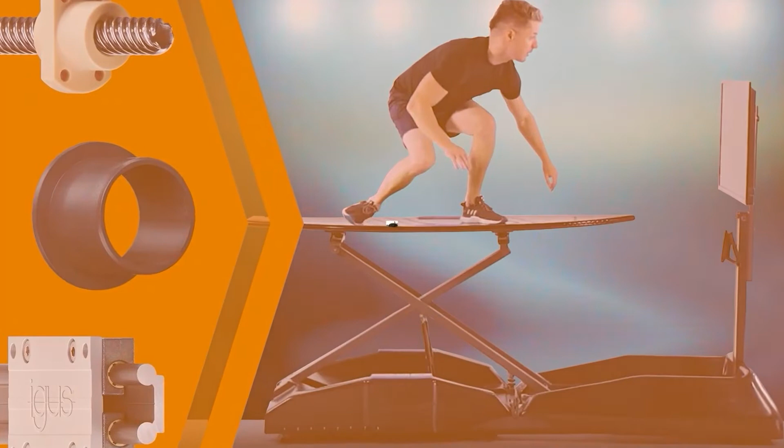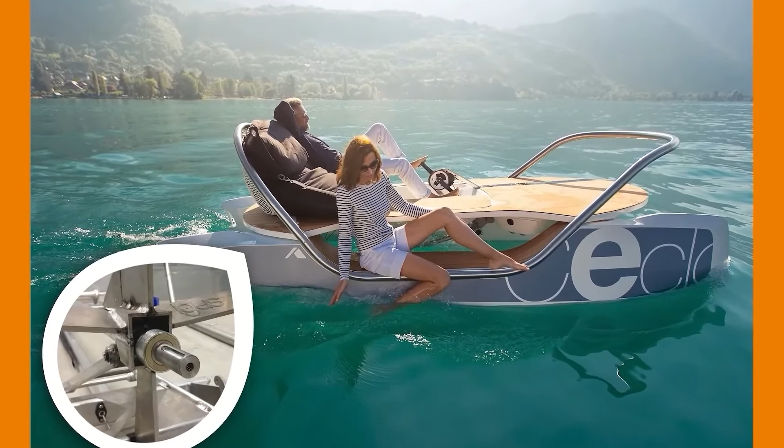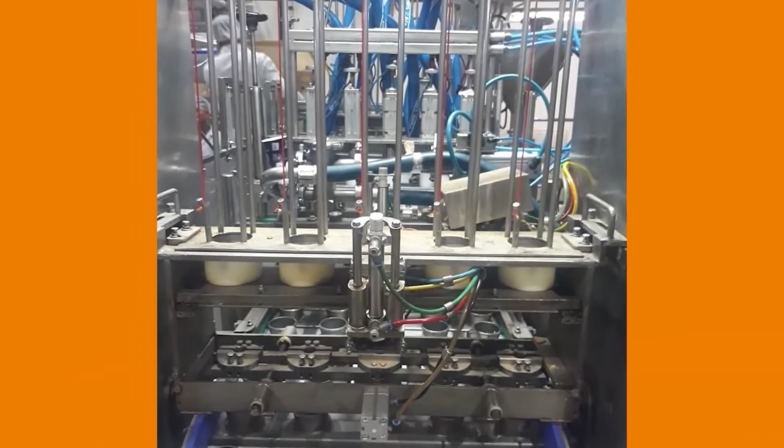The main cause for using igus plastic bearings was the need to develop a quick change system of maintenance on our pedal. The use of these components, because of their lightness, excellent wear resistance and self-lubricating capacity, turned out to be essential. Due to these positive properties of iglidur plain bearings, we can also comply with strict environmental regulations by eliminating additional lubrication. igus drylin linear bearings are lubrication-free, hence it is suitable for us to directly clean it using water and detergent. It is clean and FDA compliant.

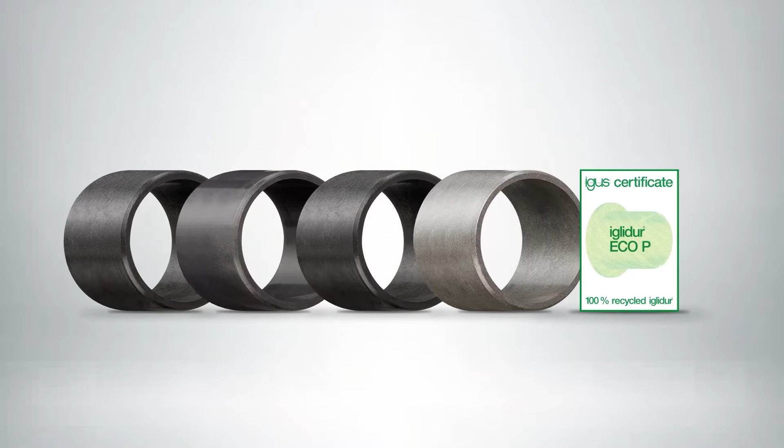First, today we are presenting the first plastic plain bearing program in the world which is manufactured from regranulate, meaning production waste. This is a true small circular economy miracle. But what does this mean? We offer plain bearings from 4 different materials in 12 different sizes, entirely made of recycled production waste.

The service life of each of these plain bearing types can be calculated online, of course. They also undergo the same testing and quality control as any other igus plain bearing does. They achieve almost identically good properties as comparable standard plain bearings.

Second, in addition, we have calculated the CO2 footprint for all 16 standard iglidur bearings from our catalog. For this purpose, we have calculated the energy balance of the complete manufacturing process of the granulate, as well as the entire process of refinement and production at igus for each individual size and each individual material. The values for each article are available in our webshop since April.

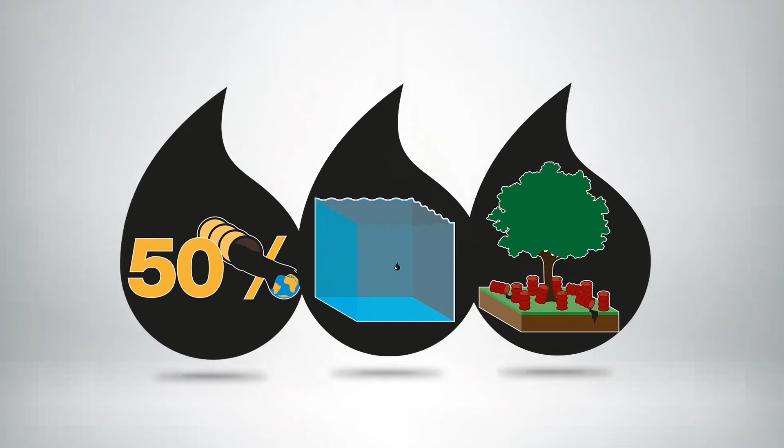All of our motion plastic products are completely free of grease and lubrication, making them the answer to a worldwide problem: pollution caused by the leakage of lubricants that often end up in our groundwater.

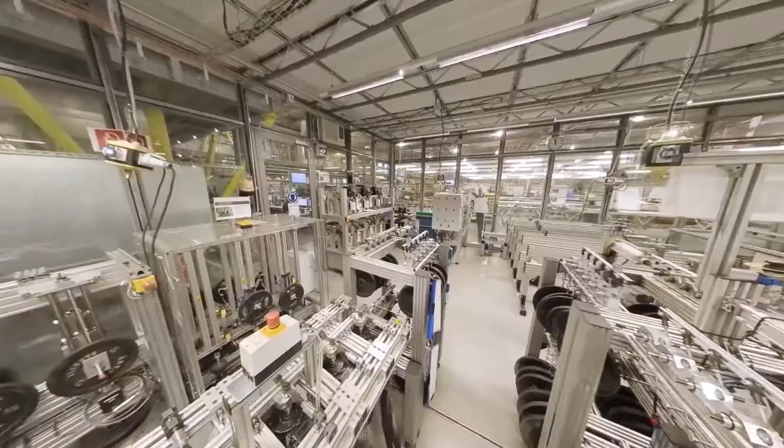50% of all lubricants sold worldwide end up as pollution. 1 liter of oil contaminates 1 million liters of water, and a total of 27 million liters of grease pollutes the environment every year.

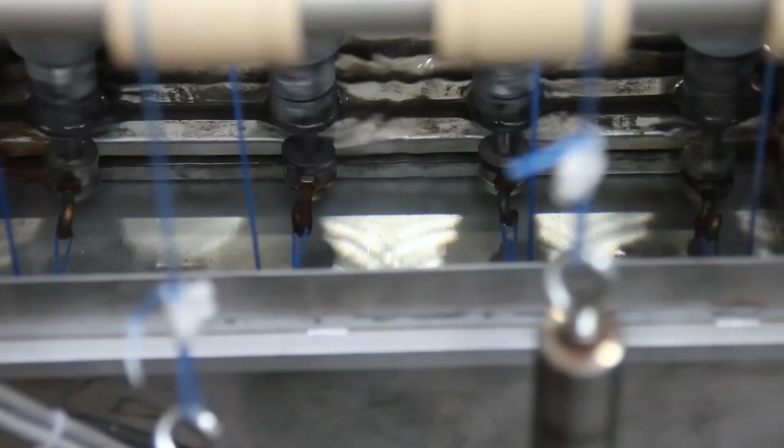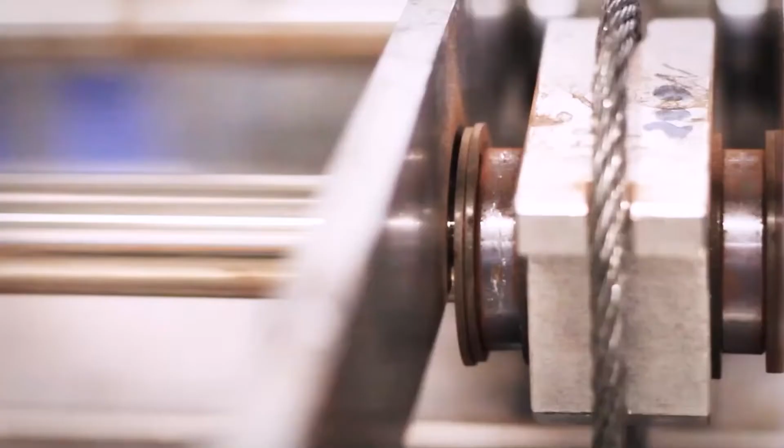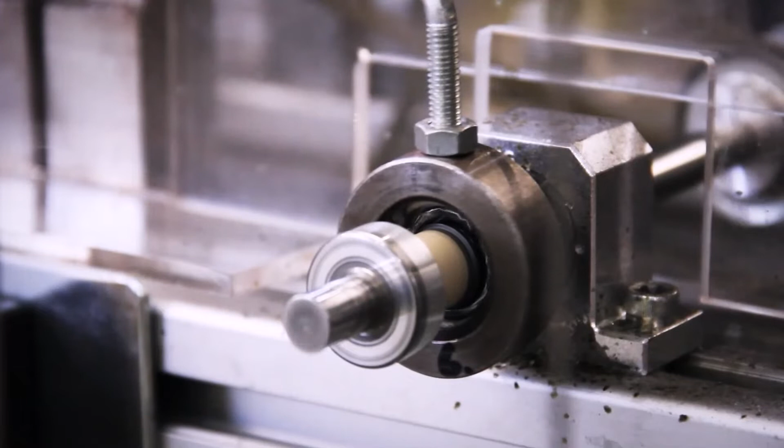However, we do not only research topics such as sustainability and freedom from lubricants, but also constantly work on making our plain bearings more durable, efficient and innovative. We perform around 11,300 tribological tests each year in our test lab to develop materials that meet the highest requirements in customer applications. Our plain bearings undergo tests for wear, friction and noise on almost 100 test rigs with over 750 test stations.

We do all this to test both their properties and their service life under different loads. The result is 60 materials which we offer in the form of standard bearings according to DIN, and many other designs. Customers can calculate the service life of each bearing online or order it from stock.

The material expertise flows directly into all motion plastic product areas. Today we will present some of the innovations that this brings out. For example, an extremely quiet 2-component ball bearing and tiny 3D printed geometries. My colleagues Lena and Tom will tell you more about these innovations now.

Imagine a bowling ball rolling over a wooden floor. Do you hear the rolling sound amplified by the soundboard of the floor? This is exactly what happens in a ball bearing made of hard race rings. Structure-borne noise amplifies the volume. It gets even worse when such a bearing is installed in a resonating body.

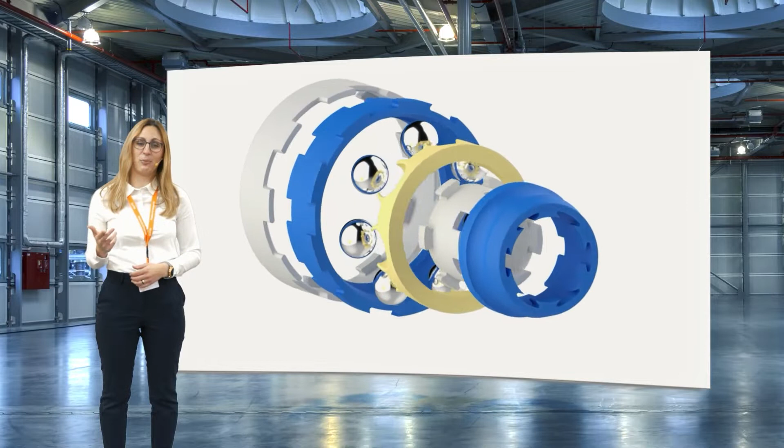A soft running layer, on the other hand, dampens the noise and prevents the transmission of structure-borne sound. By pairing 2 motion plastic materials in the bearing rings, we were able to combine the respective advantages in terms of stability and noise development in the best possible way. True to the motto, hard shell, soft core, our 2-component ball bearing has been created.

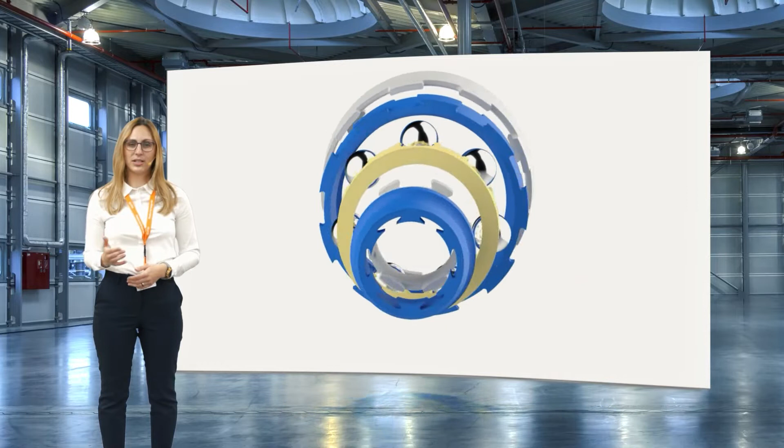The blue layer in the ball bearing takes over the dampening properties and is also highly wear resistant. One disadvantage: the material is very soft and could fall apart in a one-component variant in the worst case, especially at high speeds. To ensure dimensional stability while maintaining low noise properties, we decided to combine the soft material with a hard shell.

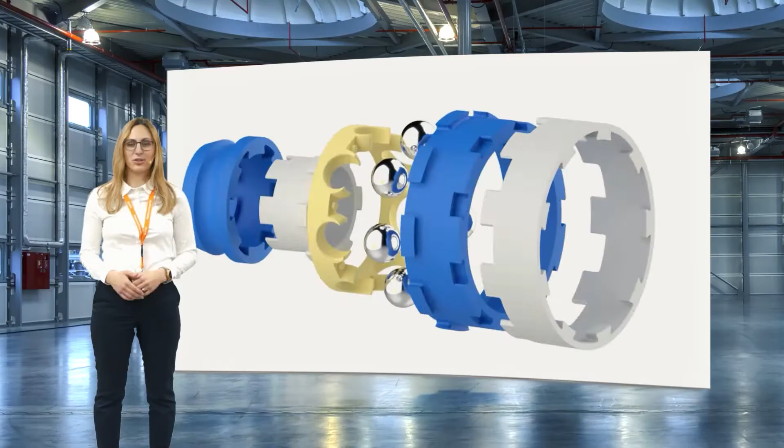Since the soft component is molded into the hard shell, the balls always run on the soft component, all supported by the hard shell, of course. The distinctive design of the shell ensures better adhesion of the materials and prevents the running layers from separating. To keep the balls at a distance, a wear-resistant cage made of iglidur J3 is used.

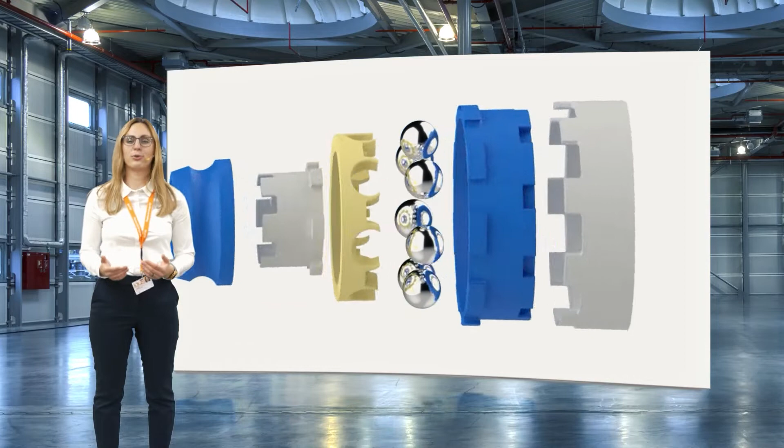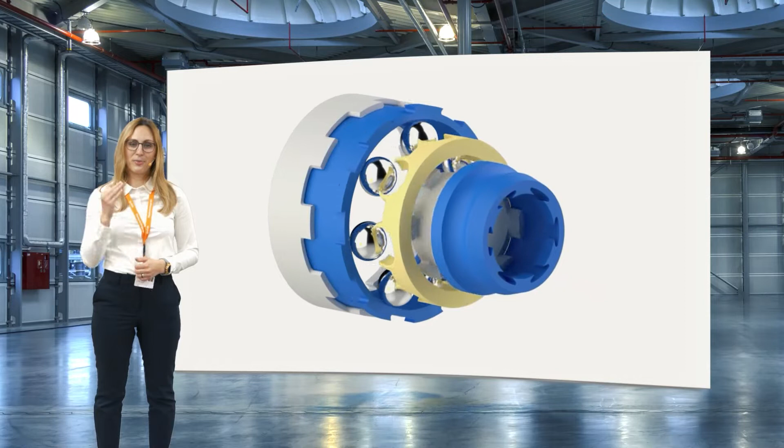The two-component ball bearing, a world innovation which is both smooth running and dimensionally stable. We see our 2K bearing in use wherever high speeds and low noise emissions are required, for example, in ventilation technology, such as bathroom, roof, or computer fans. And now to my colleague Tom with the world innovation in 3D printing.

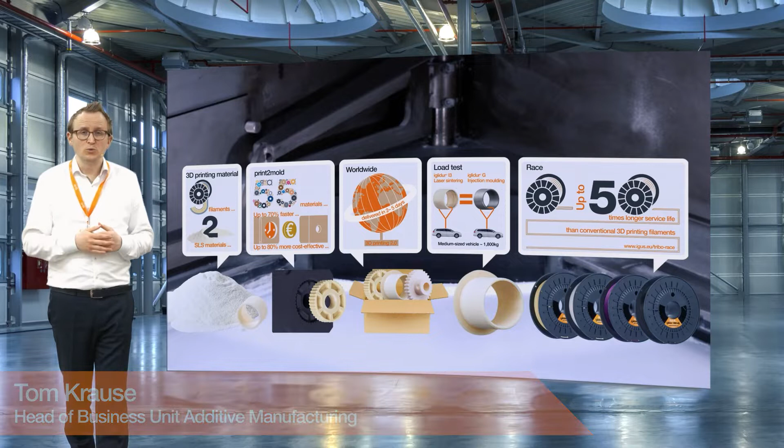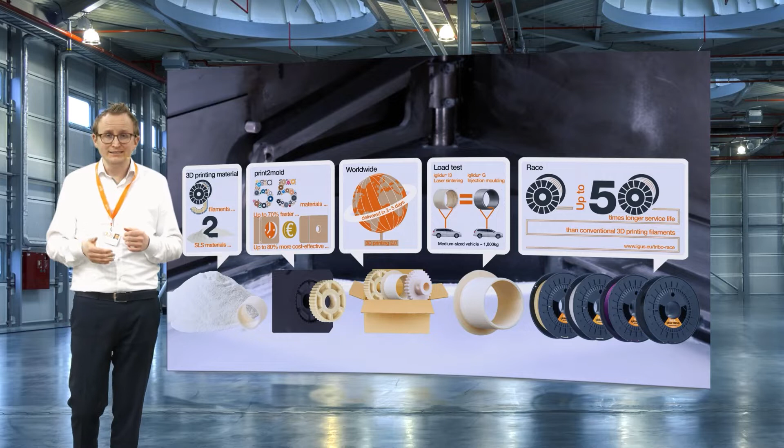3D printing is getting more and more important because it offers new possibilities for designers and scientists. As you know, in 2021, supply chains globally weren't working as well as they should be, and 3D printing can be a solution to that. In Cologne, we printed last year more than 200,000 wear parts from lot size 1 to 10,000.

But this can also be very big wear parts, up to a size of 3 meters, because this is a new big scale print service, which we already showed you last year. This year we are going to the opposite, down to 35 microns, so 0.035 millimeters. This is half as thick as your hair. And this is the new resolution of our new DLP 3D print service.

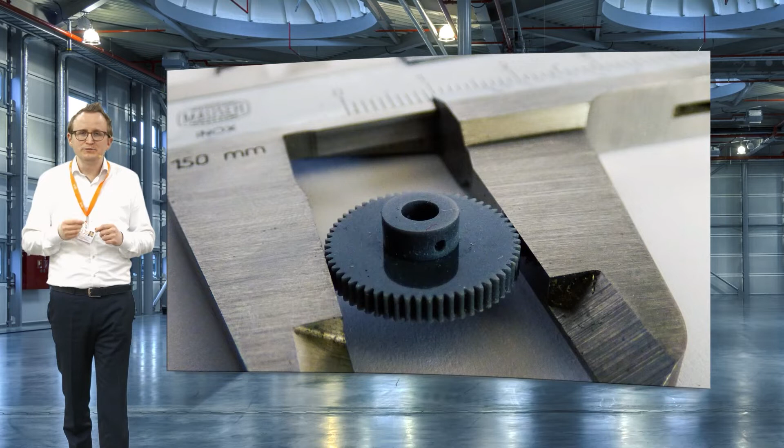DLP is digital light processing, where a liquid resin is partly hardened by a projector. The advantage of this new printing method is it's now possible to print super fine wear parts and gears with a super shiny and smooth surface. As you see on the gear, the shaft of the gear is reflected on the part.

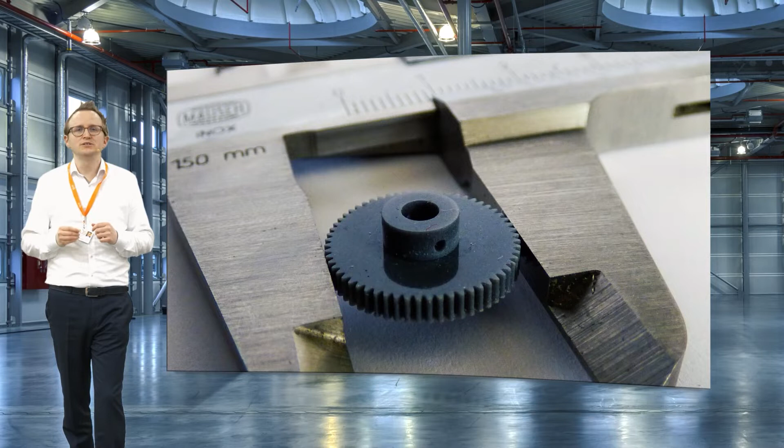This shows really good how smooth and shiny these surfaces are. But what's the new thing? The new thing is we developed a material which is especially made for wear and friction.

In the first step, we tested 10 DLP materials, which are the 10 most used materials on the market. You see the lifetime is more or less the same, there are no big differences. And we know the lifetime is not good because it wears really quickly, and therefore it's not really good suited for all kinds of wear and friction parts.

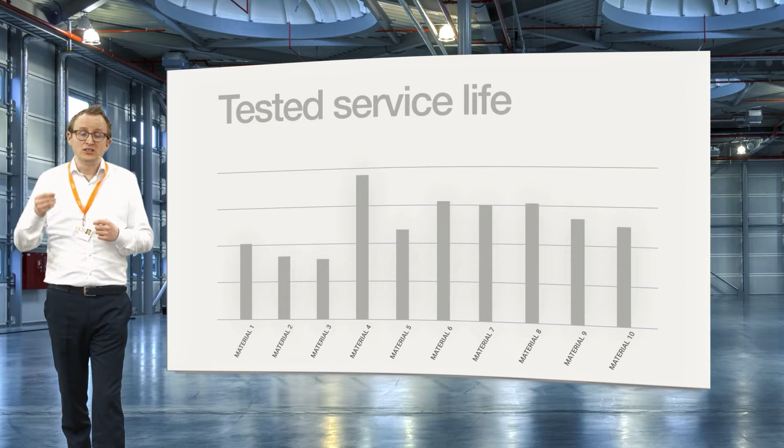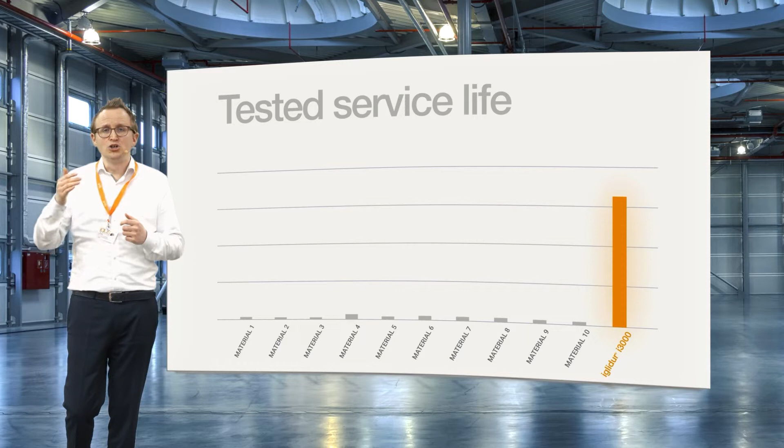In the next step, we developed and tested lots of different formulas until we found our favorite, our iglidur i3000, which is the first DLP material especially made for wear and friction, where the lifetime is 30 to 60 times higher compared to all tested DLP materials. Therefore, I'm super excited for all those new customer requests and applications for super fine wear parts and super fine gears that last just as long as regular parts.

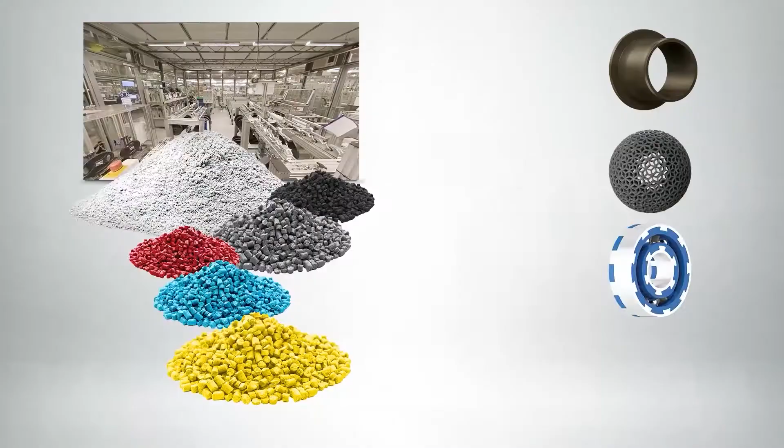The sustainable bearing, the 3 times quieter ball bearing from Lena, the super small 3D printed component with 30 times longer service life from Tom. Our materials expertise also flows directly into linear technology, because in all linear units from igus there is a plastic gliding element or a gliding foil as the heart. Stefan will tell us about the quantum leap that this igus research could make for the field of linear technology.

Welcome to the igus DryTech laboratory. Today I would like to tell you about a sensational breakthrough in the tribology of dry running plastics. The sensation is called E3.

For more than 40 years, igus has been researching tribology, the study of friction and wear, in order to achieve further quantum leaps. There have been a lot of groundbreaking developments in recent years, among many other things, an extremely abrasion-resistant bearing material for linear technology called A160, which can even be used in direct contact with food, meeting the requirements of the Food and Drug Administration, the FDA.

After years of research and countless tests in our laboratory, our developers have now managed to produce a material that has a sensational coefficient of friction. In many everyday situations and in industry, coefficients of friction determine the suitability of materials for specific applications. The pairing of materials is an important factor here, because not every material slides in the same way.

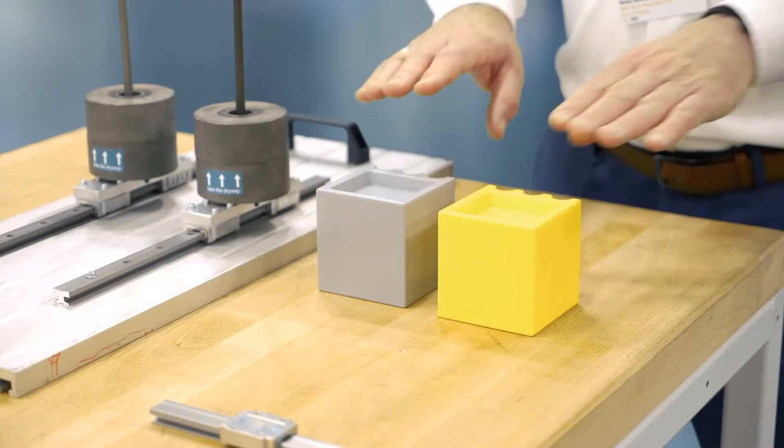One conclusion is, low coefficient of friction means low driving force. Maybe you know this from your last winter holidays when you prepared your skis or your ice skate blades to get faster. With our new development, E3, the coefficient of friction of the plastic glider in combination with the coated aluminum rail is below 0.16.

If you compare this to some standard materials, you can see an improvement in the coefficient of friction of up to 40%, and even more compared to conventional bearing materials. I would like to add, the systems are dry running without the usual external addition of oils or grease to the bearing point. The right recipe, the necessary preparation of the material, and the precisely coordinated processing of the polymers are part of this secret of the coefficient of friction.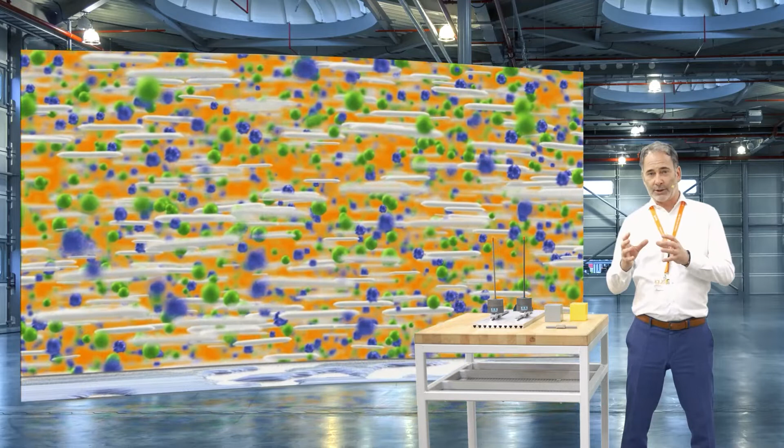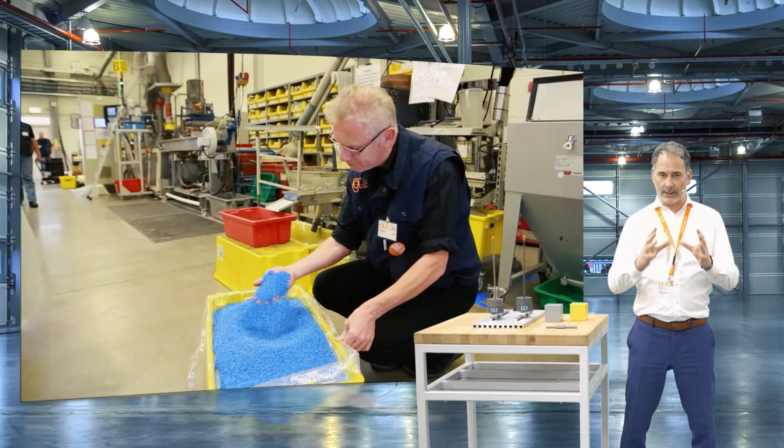In addition to the suitable base polymer, this also includes the optimal fiber orientation and length, and the smart addition of friction-reducing solids. Slight changes in the treatment of the material quickly lead to significantly worse technical parameters. Therefore, we pay attention to the highest precision and care when compounding, mixing, drying and processing in the injection molding process.

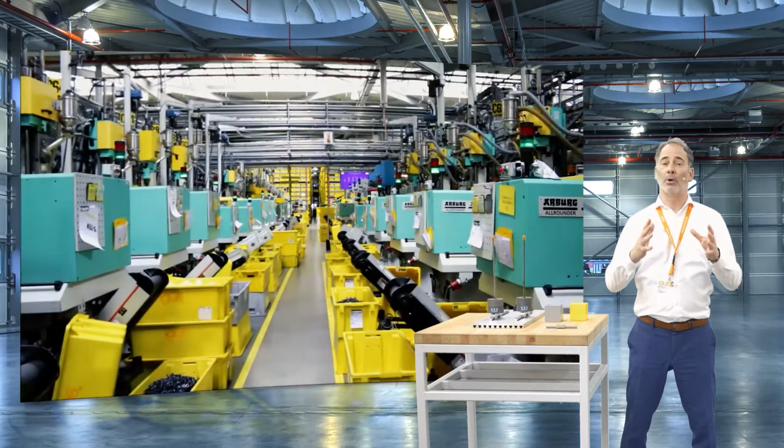The new material that I am going to present to you today is called E3 and will be used immediately in our linear technology, to describe it more precisely, in the miniature TK14 series. This small linear guide is suitable, among other things, for laboratory technology, desktop devices, medical technology, and so on. Because paired with its lack of lubricants, low weight and quiet running, this linear guide shows its strengths here in particular.

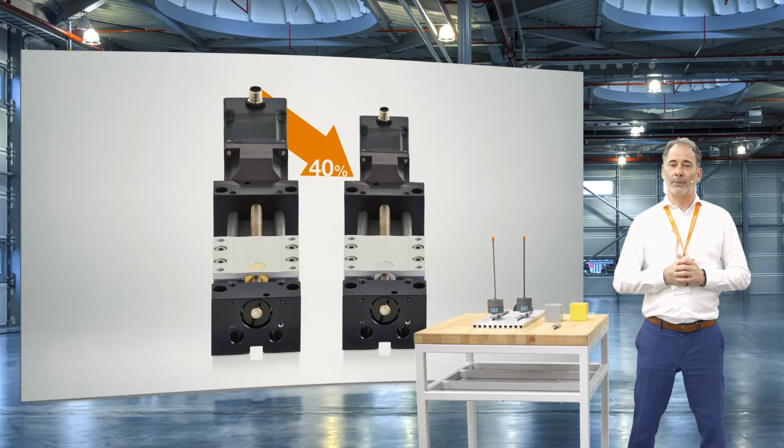In summary, what does this development mean in practice for the user, for you? First of all, the new phenomenal coefficient of friction offers operators an even more comfortable and easier moving of the slider in manual, hand-operated applications. Second point, in the case of motor-driven applications, the motor force can be reduced, or at best the motor can be selected smaller, since the driving force required is significantly reduced and energy is saved.

And also, perhaps the most interesting point for designers is the new freedom of design and construction. The 2:1 ratio that has been dominant for decades, which states that the maximum distance between the drive and the bearing may be twice the length of the bearing, is being replaced.

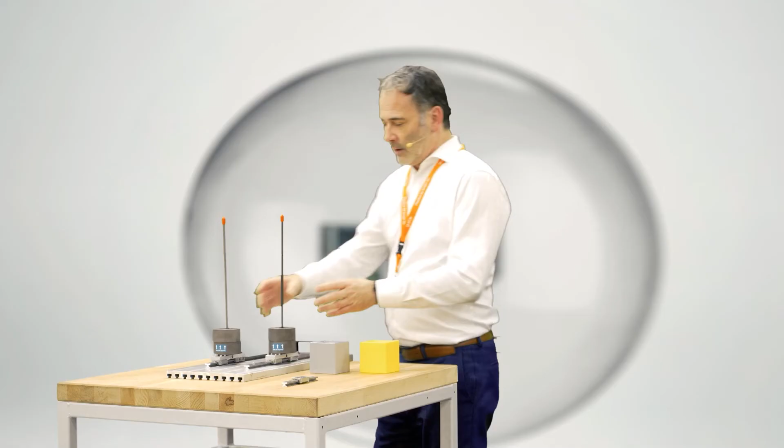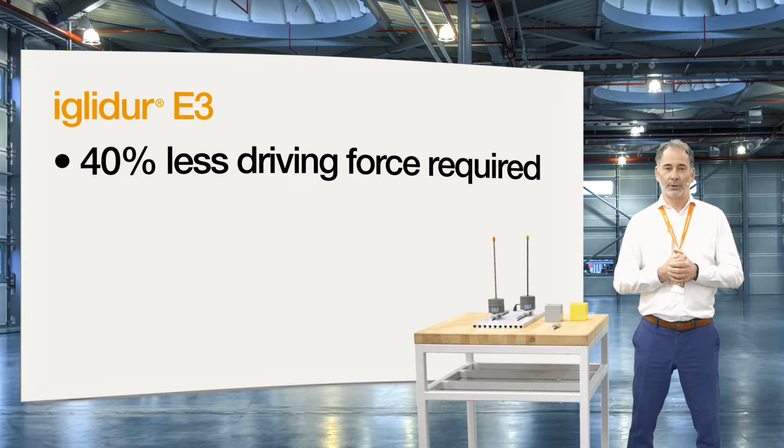For this linear system, there is now a 3:1 ratio, and the installation space for positioning the drive is increased by 50%. Summarized: the required moving forces reduced by 40%, energy requirements for motors reduced by 40%, and installation space and design freedom expanded by 50%.

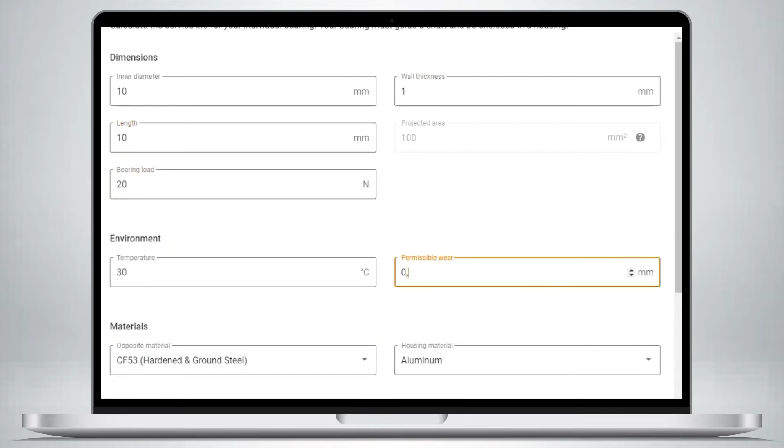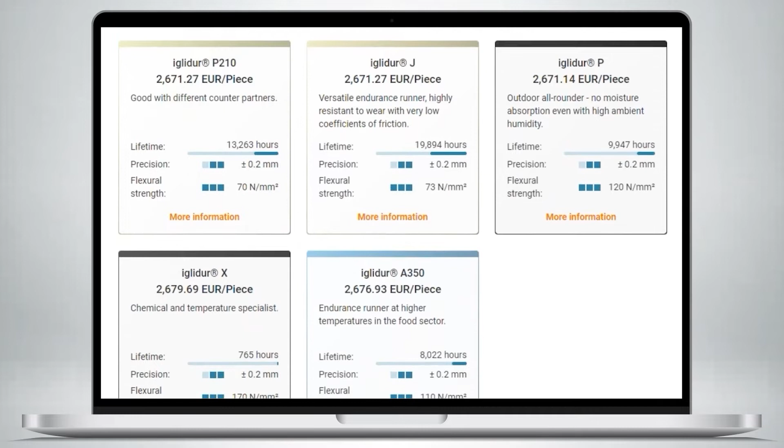New and from now on, this calculation is also possible for special components, special bearings or drawing parts, whether angular or round, no matter what geometry the part has. For any surface that is tribologically loaded, the new tool calculates the service life of the component. In addition, information is provided on the production process, 3D printing, injection molding or milling, and the recommended material from which the product can be manufactured or ordered.

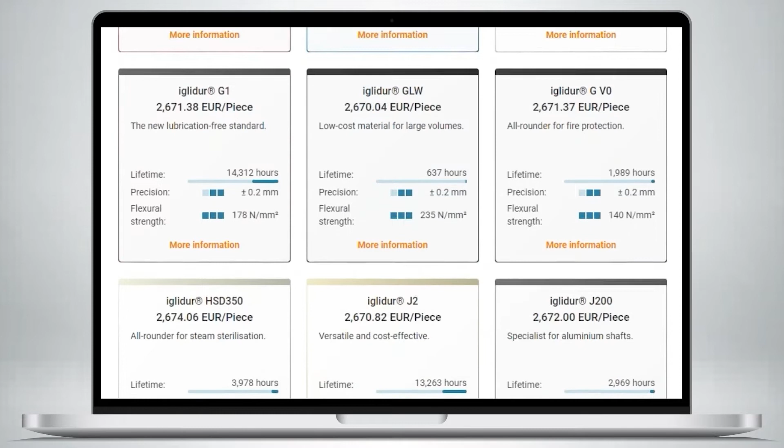This way, the tool bundles the various production processes and materials at igus and relates them to the customer's individual component. The great thing is that you no longer have to compare the materials and production processes yourself - that is done by the new tool, and you can order a special component whose service life you already know. In addition to this completely new tool, we have also optimized a lot of existing online configurators to make them even simpler and more user-friendly.

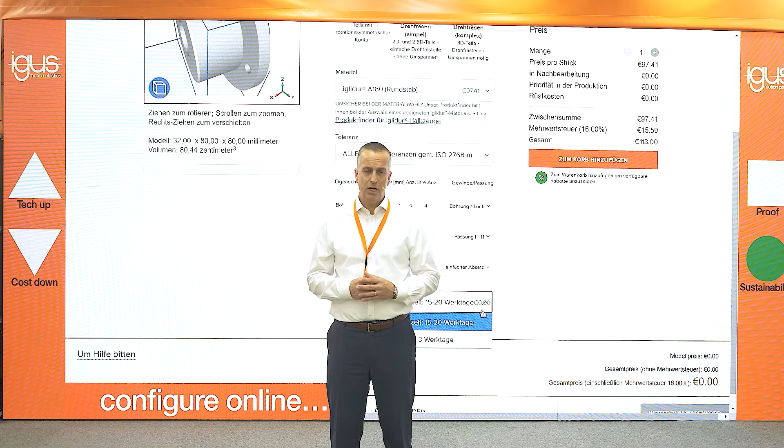For example, we have turned our CNC online service on its head and implemented a much easier operation. Pricing is easier, you can upload multiple parts, view scale prices, and online design adjustments can be made that directly show the pricing changes. And now we will see from Michael what's new from the energy chain side.

Thank you, Tobias. Welcome also from my side. We have learned a great deal in recent years about digital sales and have repeatedly taken on challenges. We asked ourselves how we could enable our customers to experience our product when we couldn't present it live on their premises.

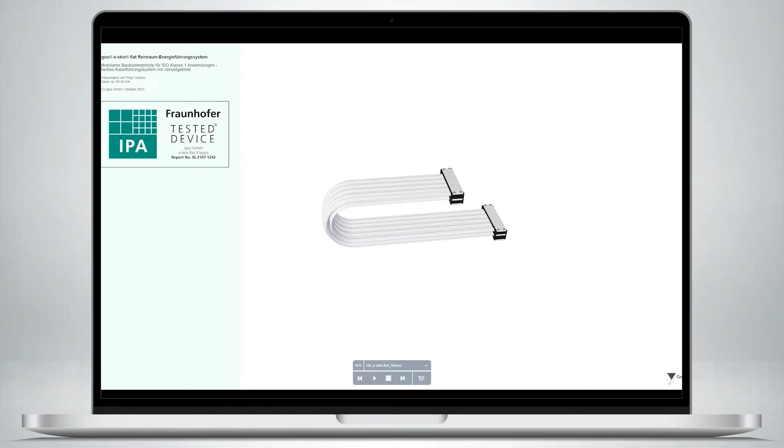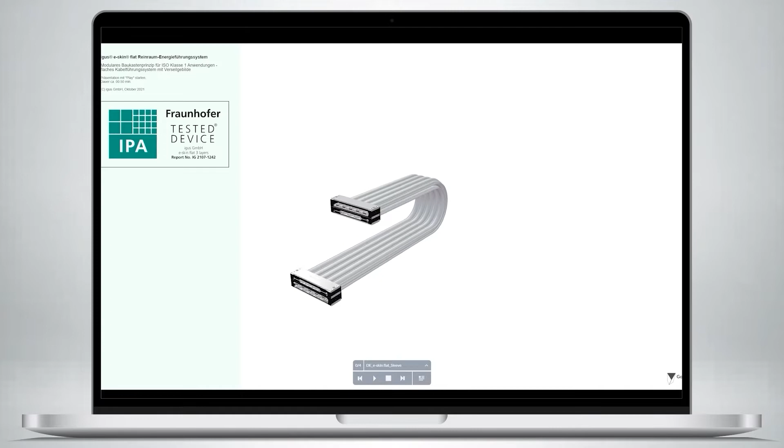Searching for support in modern engineering, we discovered Govies. The word is a hybrid of game technology and movie. Govies make objects interactive, and we have gradually introduced them for some of our products. For example, a customer can view and rotate our clean room energy chain, turn it, see inside the product through exploded views and have them described in text.

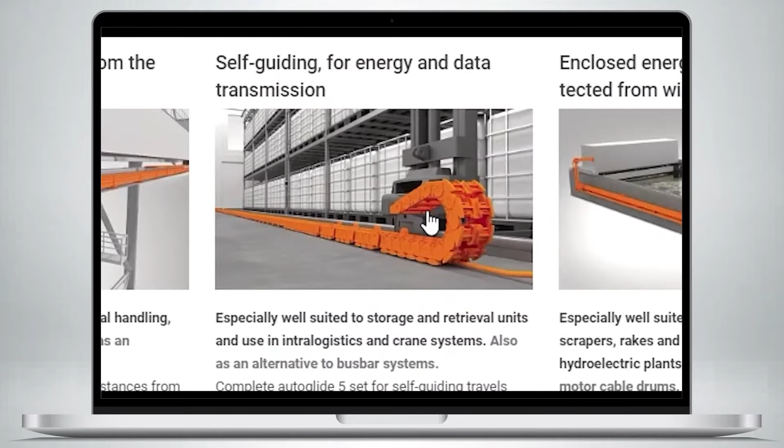In some cases, we placed our Govies directly in relation to the application, so that the virtual product presentation shows practical use and the customer can see exactly what igus products can be ordered for a complete solution. This can be seen here in examples of our micro flizz chain and Autoglide 5 for material handling. The customer can see exactly what components this complete solution requires and can order a complete set.

We call it an i.Set from the online shop in just 3 clicks. These are complete assemblies for an application with no need to collect individual parts in the shop. In addition to our virtual trade show, which we have been conducting online for 3 years and constantly refining with innovations, we are working on other artificial intelligence and digitalization projects to achieve our aspiration of being the easiest company to deal with. We will present them in the next few months.

Digitalization is a good keyword to transfer to our smart plastics, which are also making it easier and easier for customers to monitor their equipment, from cranes to storage and retrieval units, to gantries and automotive plants, to shore power systems, to machine tools. They also make it easier to reach the right maintenance and efficiency decisions. Over to Richard for the smart plastics innovations.

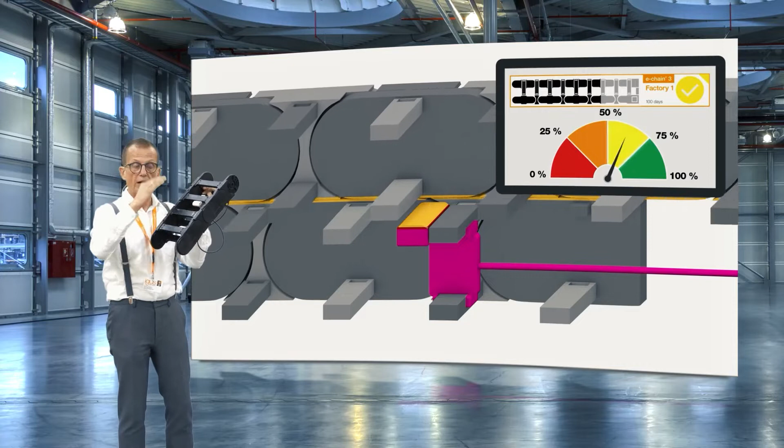For example, this one is for a gliding e-chain system. It consists of a 3D printed part with conductive layers inside. According to the wear on the side parts, by disconnecting these conductive layers, we are able to give clear steps: 100, 75, 50, 25% of the rest of life.

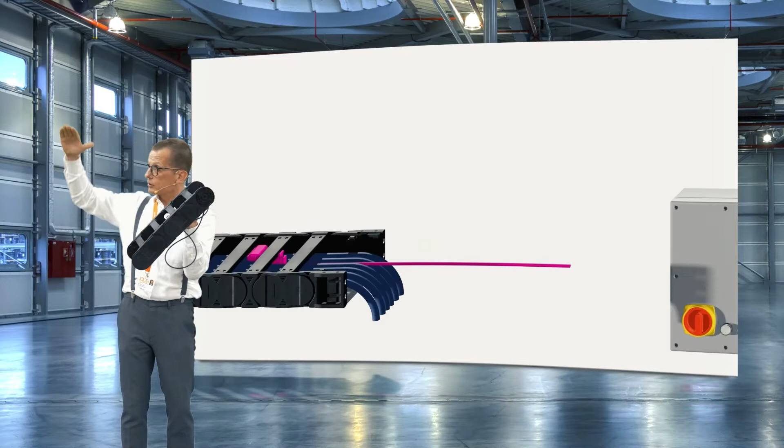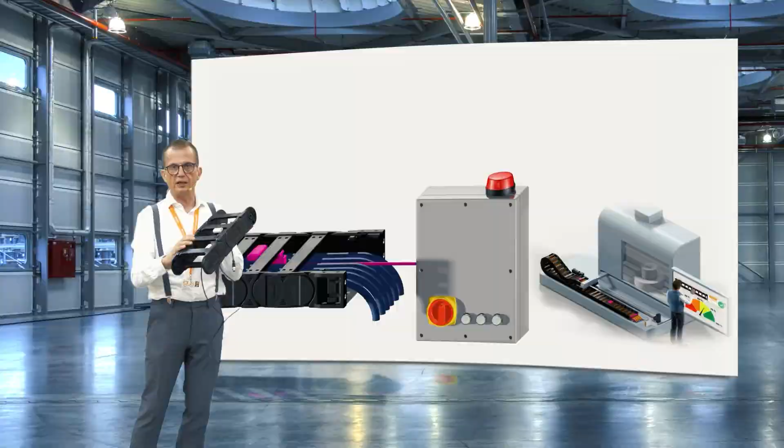At 25%, for example, customers could announce: okay, now start the process of replacement. The really new thing is we connect that directly to the existing customer PLC, to the I/O ports. And the great thing is the price of this technology - it's very simple. For gliding energy chains, this sensor starts at 250 euros.

This is digitalization at igus. But one last thing - we have a little bit more. Our engineers went ahead, and I'm very proud to present today another sensor.

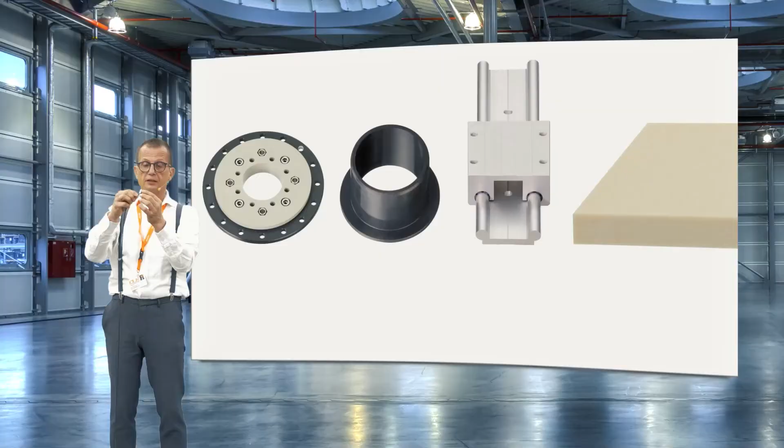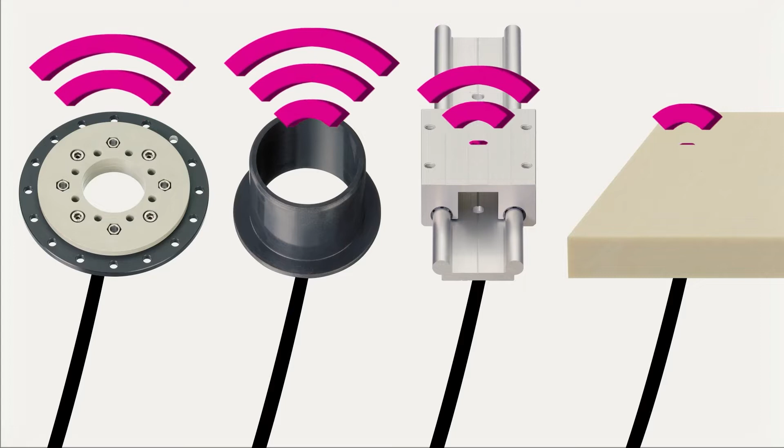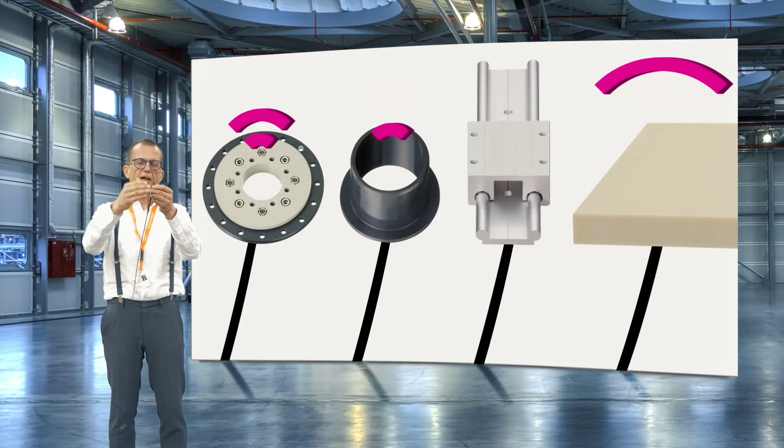It's only 2.5 by 4 millimeters. The principle is the same - conductive material will be disconnected - but it's possible to integrate it into all these polymer products: small energy chains, bearings, slewing rings, sliders, bar stock, tribo tape. All these things with a little hole inside, put this sensor inside, and in the future they'll be able to give their status to customers' PLC or to other computers.

By that, it is possible for the customer to no longer replace the product based on maintenance intervals. It is possible to change the product only if it is necessary. By that, extending the lifetime - every month of extended lifetime, every prevented service drive, will save our climate and help us reach our target of climate neutrality faster.

And probably, Michael, that is your next topic. Back to you.

Moving energy made easy for the circular economy - CO2 footprint and climate-friendly production.

We have also continued to dig into these issues over the past year. As part of igus' own recycling program, chainge, we have been recycling energy chains that have reached the end of their product life cycle for 4 years now. Since the program's launch, we have collected 32 tons of material.

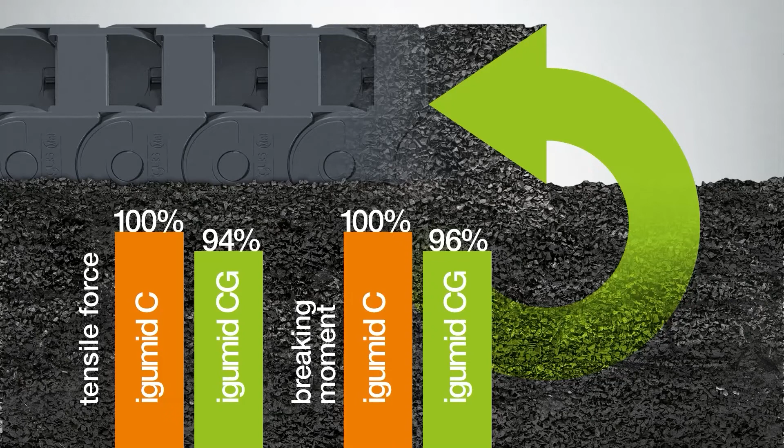This year, we are launching the first energy chain made of 100% recycled material, from ocean plastics to motion plastics. Our customers, whose purchasing decisions are increasingly influenced by ecological considerations, can look forward to the new Cradle e-chain range made entirely of recycled material that achieves almost the same strength.

The product range includes 5 series and 28 chain types that can be delivered from stock. According to the Environmental Product Declaration, CO2 is significantly reduced and saved through the sustainable raw material cycle.

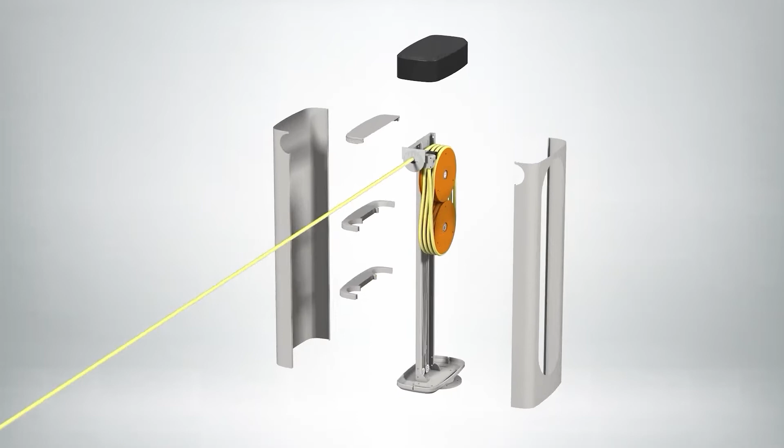With our next innovation, igus eTract, we are dedicating ourselves to the field of electromobility. We have developed an automatic cable retraction system that can be integrated into all commercially available wallbox systems. This can make it even easier for end users to charge their cars, since they no longer have to worry about tangled cables.

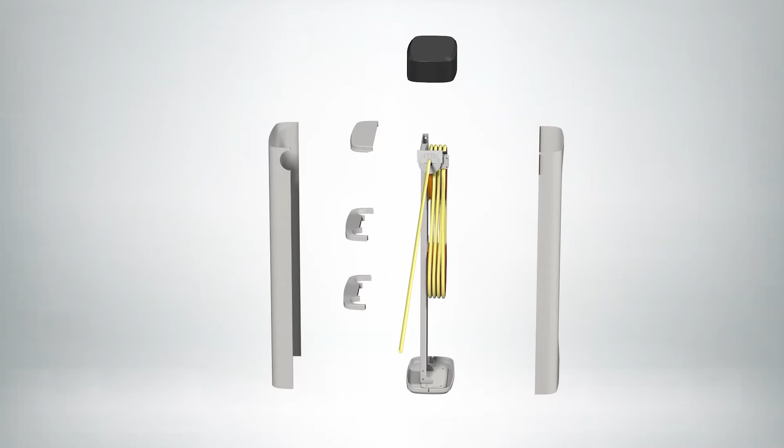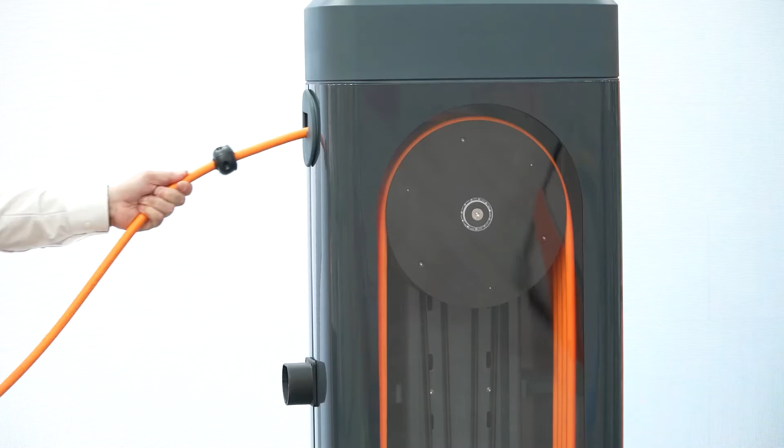The system ensures that cables are always rolled up and tidy, with additional protection in the form of cable-friendly plastic rollers and a defined bending radius. It can adapt to a given parking situation because it's pivoted. Installation of the charging cable is child's play and can also be carried out afterwards. We have also added another detail: a cable lock that prevents access to the expensive charging cable.

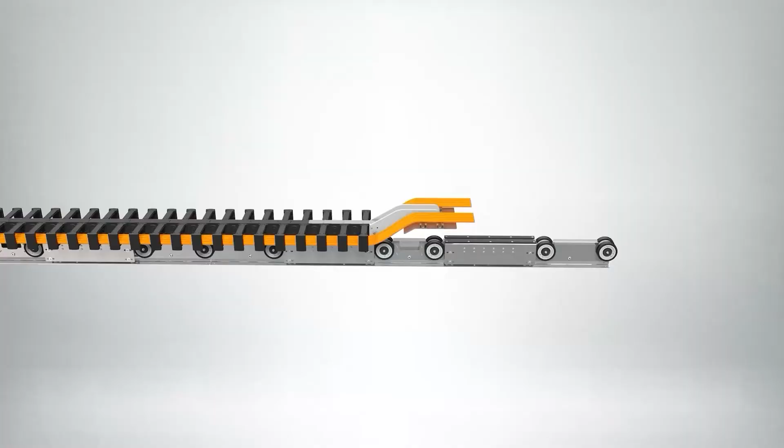Now we come to a world's first, the igus driving chain. With this innovation, igus is advancing into new dimensions for long energy supply travels. You could even say it almost entirely dissolves limits in travel distances of energy chains. The igus driving chain is the world's first powered e-chain system for long distances.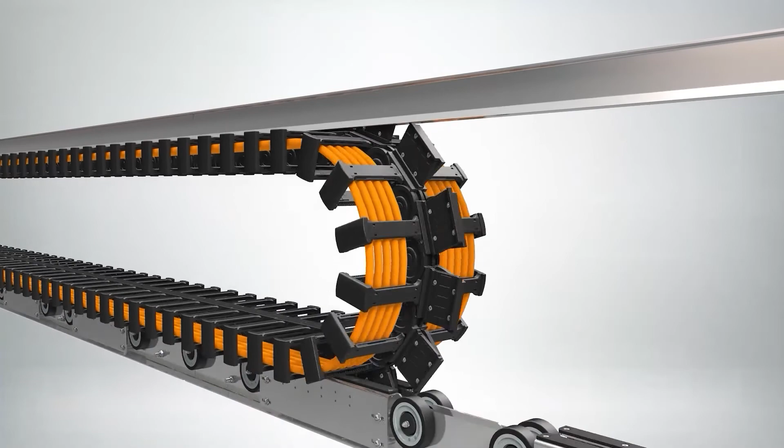In order to efficiently transport goods, raw materials, products and containers, modern logistics systems in this area must meet more and more demanding requirements with respect to moving masses and dynamics in combination with service life and availability. The igus design studies presented here solve this problem with two new principles. Both versions are being further developed and tested.

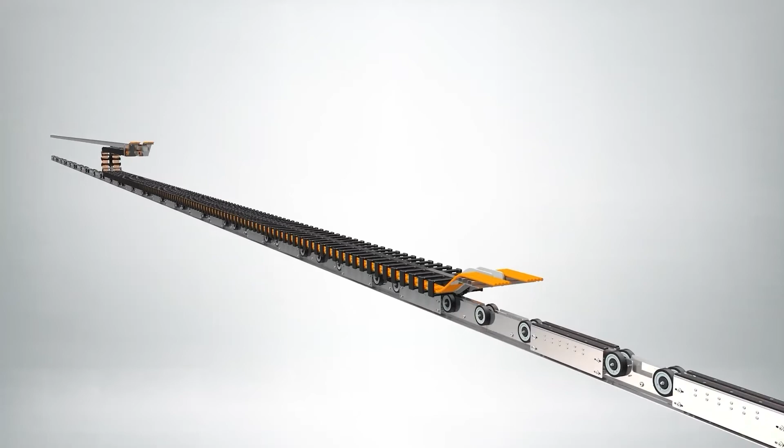First, a wheel drive, a friction wheel drive, which acts on the specially designed drive board of a new type of e-chain. An additional refinement is linear motion technology, where the drive forces are transferred directly to the e-chain's board elements without a wheel drive.

Typical systems are automatic stacker cranes for freight containers with lengths of up to 500 meters and speeds of up to 6 meters per second, and stacker reclaimers for conveying and handling raw materials with travels of over 1,000 meters. Both proposed solutions have economical design, so they do not require increased energy consumption because the required push-pull forces are much lower. In theory, the driving chain is even reduced because the moving masses are smaller.

The decisive factor is this innovative application of force by means of the board elements. System construction, installation and alignment are less complicated than with conventional guide trough systems. In principle, this solution has no limitation in terms of travel length, so unlimited energy supply systems could be set up. Rainer will now introduce more innovations related to highly flexible chainflex cables.

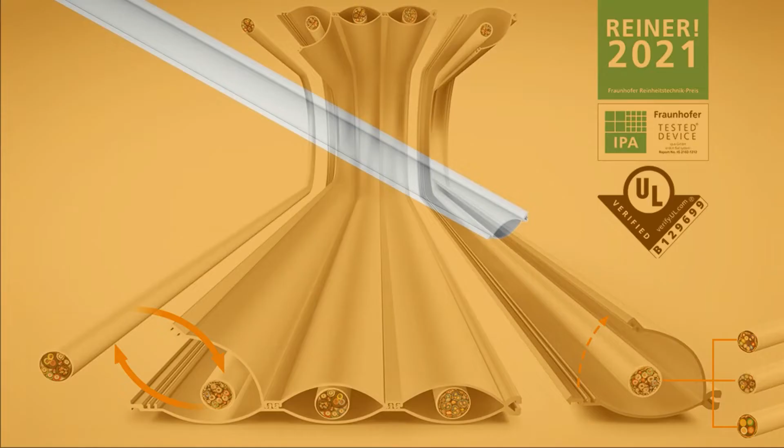The e-skin flat system is as modular as conventional e-chain systems. It is expandable, easily replacing chainflex clean cables even with connectors, or adding or removing individual pods. With over 110 million test cycles in the laboratory, now tested and with 36 months guarantee.

But what's new? What's so absolutely unique is that the e-skin flat is available in combination with the AWM approved chainflex clean cables as a UL listed product according to L1382. This is the first listed energy chain system in the world that we know of. The customer can use it in all relevant cleanroom or high acceleration applications without further testing by UL, from stock, simple, modular, tested and guaranteed for 36 months.

This will change the cable market: high-end, non-flame retardant TPE cable with UL. Here you can see two cables in a highly dynamic chain system, developed for moving applications in the e-chain.

You will certainly know that in the past, if you had to have a product with UL approval, one of the UL basic requirements was always flame resistance, for example for cables. According to the NFPA, machine fires are the number 4 leading cause of fire in the industrial environment in the United States, from unclassified wires, including loose clamps, connections, overloads, and broken cables. But how can that be when the cables have UL and are flame retardant?

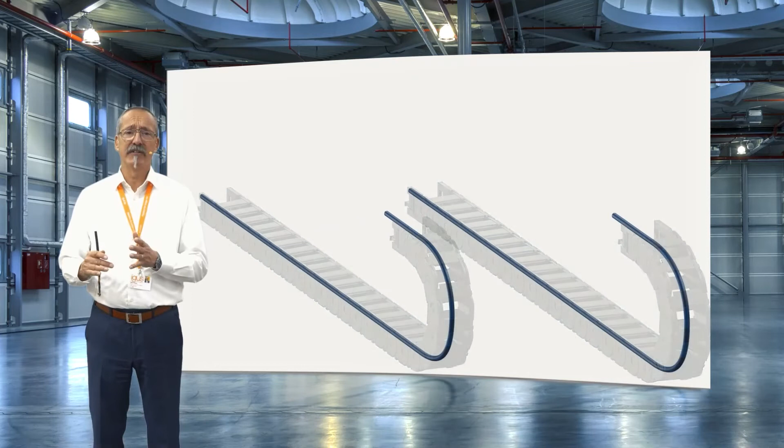For this, you have to deal with the subject of soft plastics in motion. To make a cable jacket flame retardant, retardants are added to the basic jacket material. However, flame retardants can massively reduce the bending strength of a jacket material or jacket plastics, meaning they can lead to earlier jacket or cable breakage, and lead to fire.

Okay, that's a lot of background information. Now we come to, let's say, the revolution of the news, because the igus approach with our high-end, halogen-free, non-flame-retardant chainflex cable is completely new. With the 3,800 square meter igus laboratory, and in cooperation with the Underwriters Laboratories, we were able to develop and prove that our non-flame retardant TPE jacket cables last at least 25 to 40% longer than the same but flame retardant versions.

This means with our halogen-free chainflex high-end cables, igus prevents fires from starting instead of minimizing the spread of a fire that has already started. Because once there has been a fire, the system must be repaired. In conclusion, igus was the first manufacturer worldwide to obtain UL AWM approval for non-flame retardant cables for use in E-chains, offering customers completely new possibilities in high dynamic applications, with UL approval and a 36-month chainflex guarantee, including higher system availability.

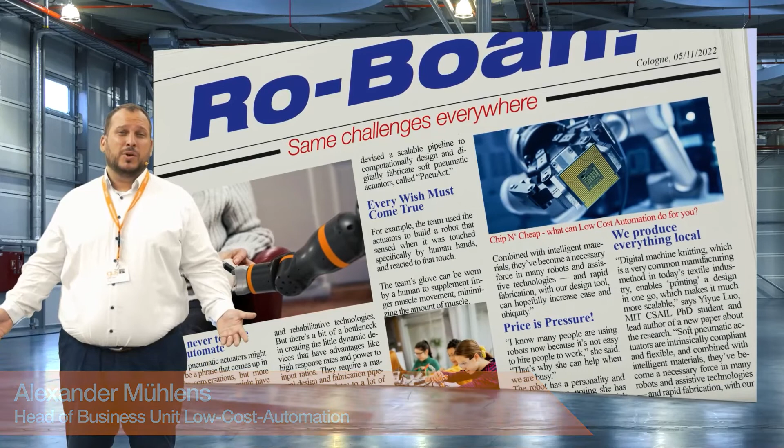Let's solve the challenges of our time. We've all got the same challenges. On one side, price pressure, more local production, one-piece production, extreme product diversity, so everyone has to automate in general. On the other side, no boring jobs, ergonomic inclusion. I think people expect answers.

We are presenting a new solution today, available from today: the Rebel. This very beautiful robot, a 6-axis robot with cobot functions for 4,970 euros, made in Germany. Yes, that sounds unbelievable, but it works. It works through motion plastics.

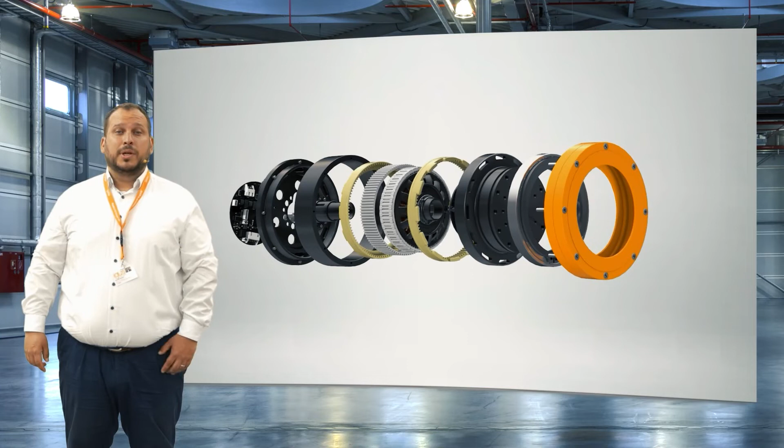The core is the motion plastic Tribo plastic wave gear, with BLDC motor, power electronics, and absolute encoder. Nearly 90% of all parts inside the Rebel are made from plastics, components like the flex ring, ball bearings, and functional elements of the circuit board. Let's have a look into the details.

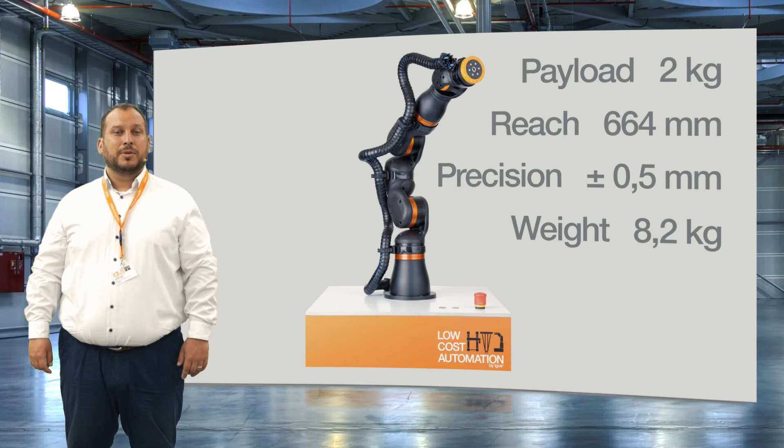The Rebel has a payload of 2 kilograms, a maximum reach of 664 millimeters, a precision of plus minus 0.5 millimeters, and through plastic, extreme lightweight at 8.2 kilograms.

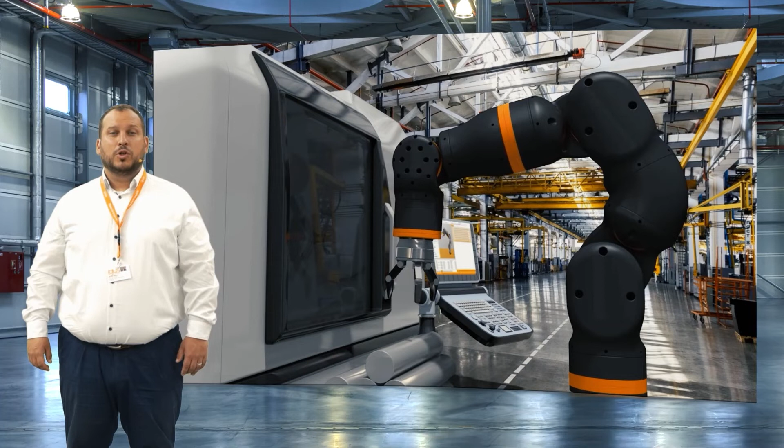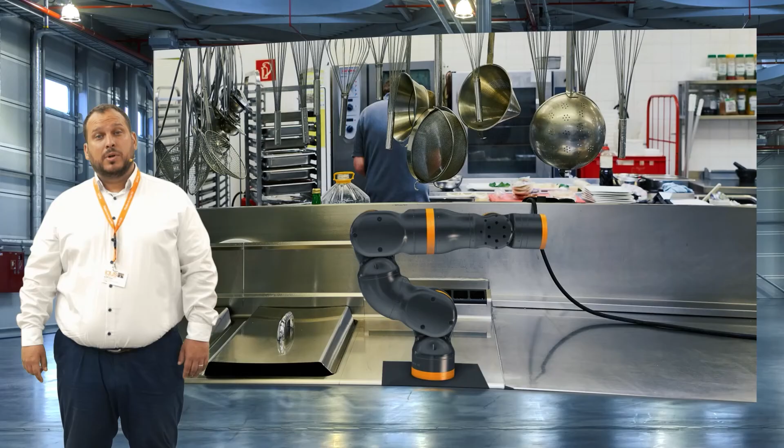There are many areas of application for the Rebel: quality control with camera, pick and place, research and education. But through the massive affordability, completely new ones are available too, like restaurant automation, agricultural applications, and distribution centers, for example for food deliveries, that have to automate. I think the Rebel has the potential of being a tool like a hammer that helps employees throughout the working day. But this is not the end.

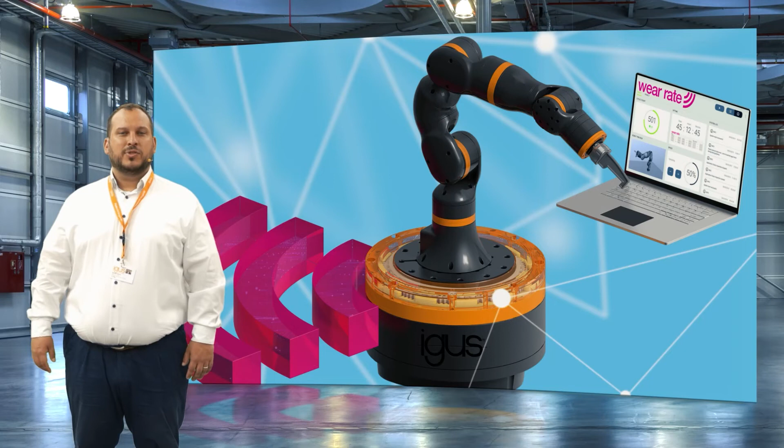We made the Rebel smart with smart plastics. From now on, there's live status management available via the cloud for wear monitoring or just for webcam connection. The whole thing can be configured immediately with suitable grippers and cameras on the igus-powered marketplace RBTX.com. You can get a live price or compatibility guarantee.

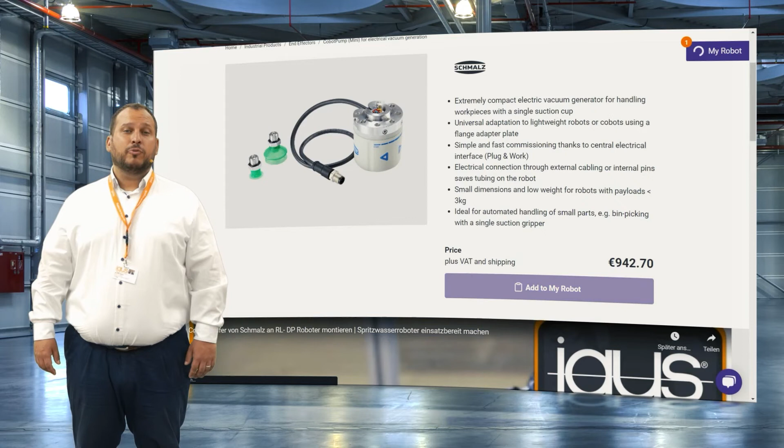Additionally, for everyone who wants to use this open source with ROS nodes or other integrations for MatLab, Simulink, or DASYLab, the open source version of the Rebel starts from 3,970 euros. Let's solve the challenges of our time. Be an automation hero with low-cost automation.

Thank you, Alexander. The RBTX marketplace platform for low-cost automation is starting to become a big success. We have plans to offer it in 15 countries worldwide by the end of the year.

And the COVID pandemic made it possible that customers take remote services really seriously. This service on the platform, the RBTX Expert, is a remote integration service with a fixed price, where customers very often get a complete automation solution for 8,000 to 9,000 euros, including everything—gripper, camera, conveyor belt—which wouldn't have been possible 2.5 years ago. Just in Germany alone, last week we did 28 such remote projects in one week.